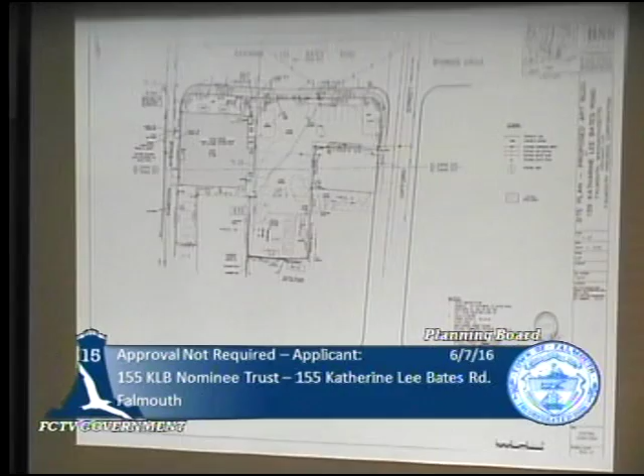The overall lot coverage by both buildings, paving, and parking is 70.57%, which is 5% over what's allowed in the B3. Actually, it's over what's allowed in the B2 also, I believe.

We saw that this building is non-conforming to the setbacks from both Haddon Avenue and Katharine Lee Bates, so we went to Eladio Gore and got a front yard designation letter, which makes Gifford Street the only street where the buildings are at least 25 feet back. So Gifford Street is the primary front yard, with a primary front yard setback of 25 feet. Katharine Lee Bates is required to have no more than a 10-foot setback from the street line for structures.

All the underground utilities are in Gifford Street and Haddon Avenue, partly because of the history of how Katharine Lee Bates was put in. These were two through streets, and water, gas, electric, and everything is down here, and the same here. There's actually a short sewer stub in here, which I can get to later. But there are no utilities in here, and there was a comment from the engineering department about not cutting Katharine Lee Bates — there's a moratorium on it. As it worked out, the moratorium on cutting Gifford Street has lapsed, so we're coming in with utilities from Gifford Street. No need to cut Katharine Lee Bates.

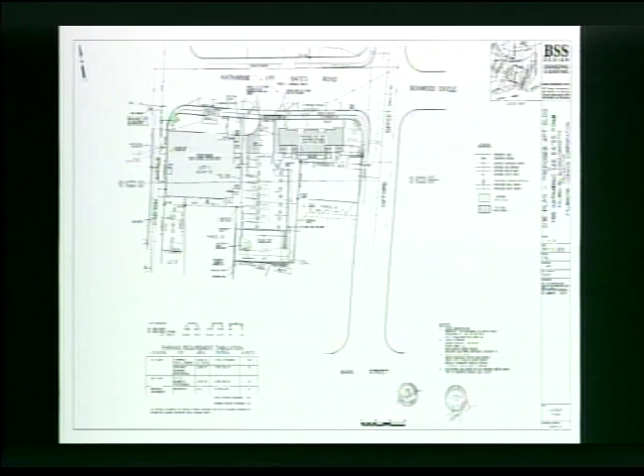The curb cut is basically the same, though we had to move it to the west about 6 or 7 feet because of the size of the building. You can see it's moved over and redefined a little bit. It's a little undefined right now, so we put in some more curbing. It's 20 feet wide at the throat, and widens out.

Since many, or all, of the Fairwinds Clubhouse members are dropped off by car, or use the couple of large vans Fairwinds has, we have a large area here for drop-off and pick-up. There's a crosswalk running from the apartment building to the front door of Fairwinds, and also a handicap spot. Together that makes 29 feet here, including the crosswalk, and another 8 feet with one handicap spot, which will generally be open — basically open for emergency vehicles too, since they do occasionally get an ambulance call here.

My office happens to be right over here, so we get to see some of the excitement that goes on once in a while.

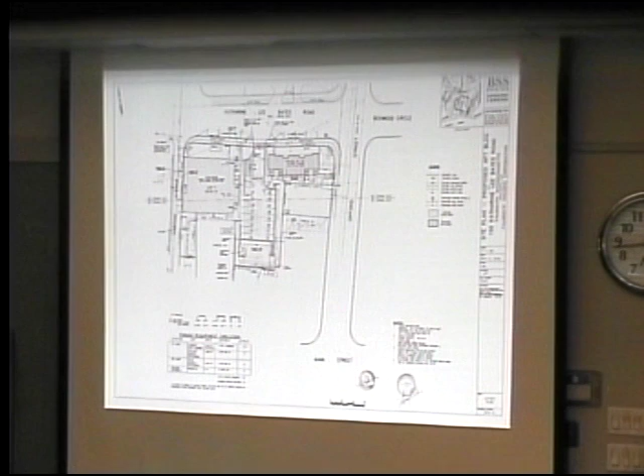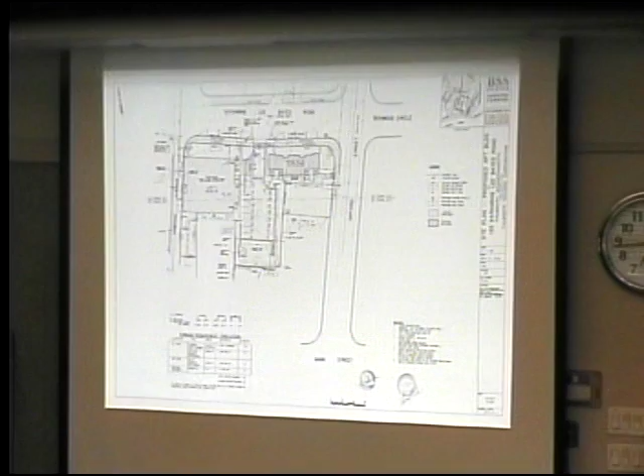So we have the vans dropping off, coming in here. There's a large gravel area where they can drive in, turn around, or pull into one of these spots. There's also the dumpster back here — right now it's a little further up, where the existing pavement ends, up the hill. This building takes up about 7 parking spaces, but we've added 4 parking spaces down here. From what we've seen from our window, the parking need hardly ever fills this up.

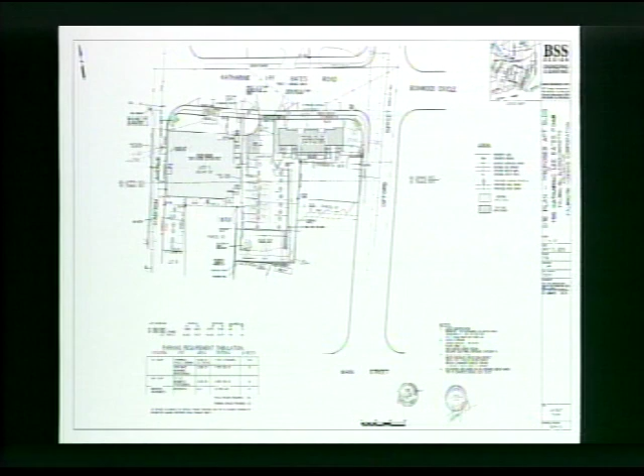As you can see, it's just a simple paved driveway, straight in here. The grading runs from Katharine Lee Bates down, and this is the low spot on the property, so runoff will flow into a catch basin down here, and we do have 2 leaching pits in this location.

So we have the 2 leaching pits here, that's for the parking and stormwater runoff. The apartment building will have downspouts and pipes running to a leaching pit in this location for this building.

There was a comment in the engineering review about this being undersized. In my response I noted it wasn't clear, but we're improving the stormwater runoff situation by adding this drainage, though it's only enough for the north half of the building flowing into this location.

We have requested a reduction in the parking requirement by special permit, from I believe 32 spaces to 23 spaces. This is based on several factors: the different peak hours of use, and the different businesses here like the printing shop, where people come in and pick up, and some offices with different hours.

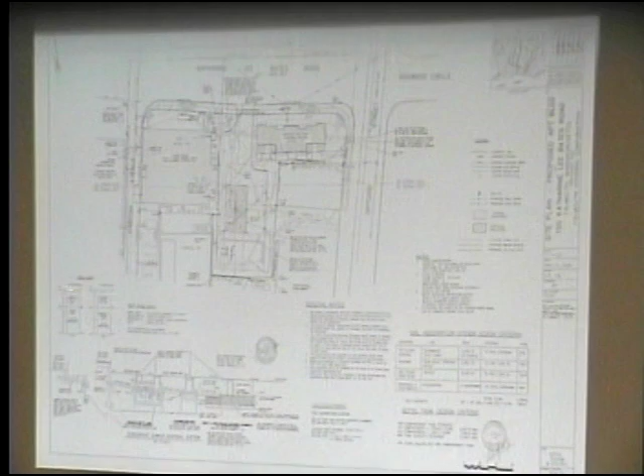So we have them shown here now. We did not do a test pit in this location or this one, but we know from here that once you get through the fill... this used to be a car repair or car sales shop, so it's sort of reclaimed land with fill there. This location was historically a house site, taken over by Katharine Lee Bates. We don't expect fill in this location.

I know from other excavations nearby that down 4 or 5 feet it's sand and gravel. I added the note Scott requested, that any strip out, similar to a septic system strip out, will remove unsuitable material from around the drainage pits, both here and if any is encountered in the other locations.

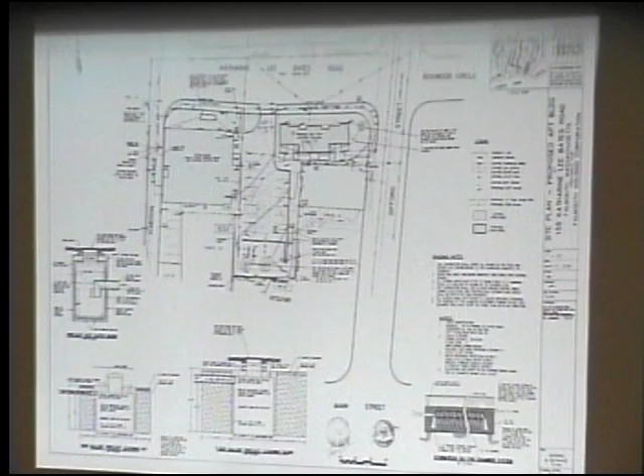Tom Lee's office did the landscape plan. So briefly, some of these are existing trees. There are 2 trees here, Norway, I believe sycamore maples, in this location that are in not good health. They are on, I have to check, which property they're on. I know one of them is on our property.

Do you recall, Tom, both of them? The lower one is on our property. This one, the larger one, is also on our property. This one is in poor health and causes somewhat of a blind spot coming out. But anyway, these two, because of their health condition, are proposed to be removed.

Another street tree added here, and then within the parking areas, some other trees added. Also some screening trees or shrubs along here and along here.

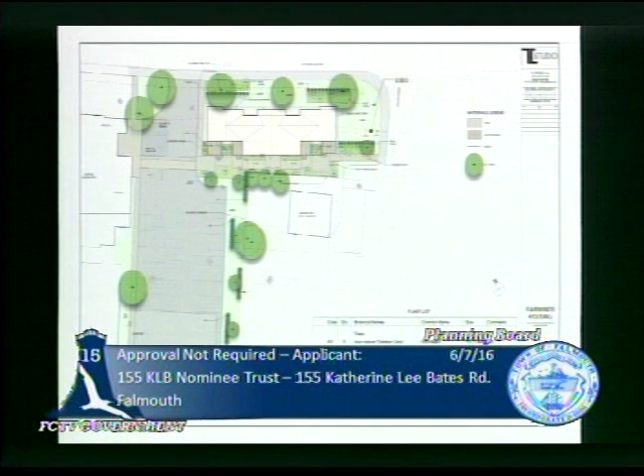This is a series - there's 4 decks, 1 per unit here, and a series of concrete patio walkway areas through here. So there are interior walkways.

One purpose is to get the occupants over to the building, to the clubhouse, but it also opens up and connects with the existing sidewalk on Gifford Street here, and there's a sidewalk up along here to get to Katharine Lee Bates, and on this side of the driveway to get up to Katharine Lee Bates.

So there's good pedestrian circulation in here, and I think good screening between the existing trees that we have here and around, and the proposed trees and shrubs - a good landscape design going there.

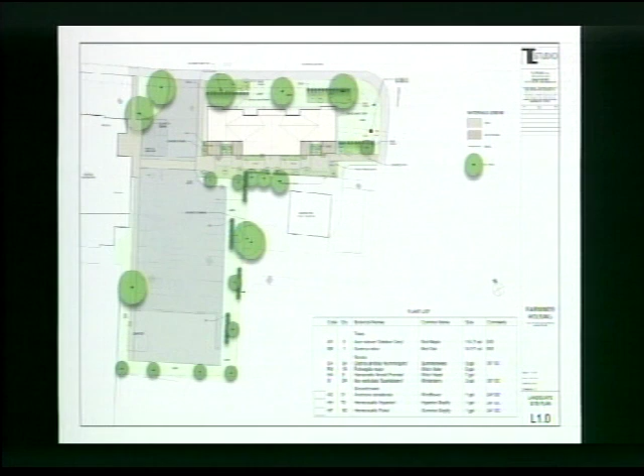Their activities will be focused back here and over to the clubhouse, and not going directly out to the sidewalk on Katharine Lee Bates. So there are no doorways along this side of the building.

So this is the south elevation facing onto the site. We have the doors here - there's a door, sort of a side opening door there and a side opening door there. This, I think, is the door that just goes down into the basement.

And then the west elevation, this will be visible from the Fairwinds Clubhouse, and this is the elevation that will be visible from Gifford Street.

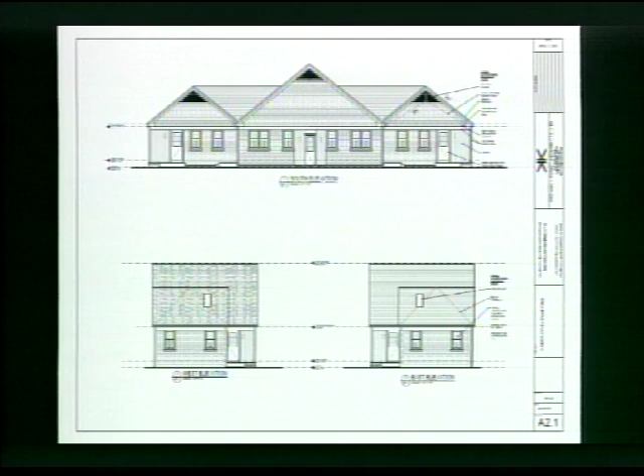Well, there are the floor plans, we can go through that quickly. I don't know if you want to talk about this, John, or I can just go through it quickly. Let's go quickly - yeah, it's basically just 4 units. There's a bathroom, kitchen, bedroom area in each unit. 4 units, 1, 2, 3, 4 units.

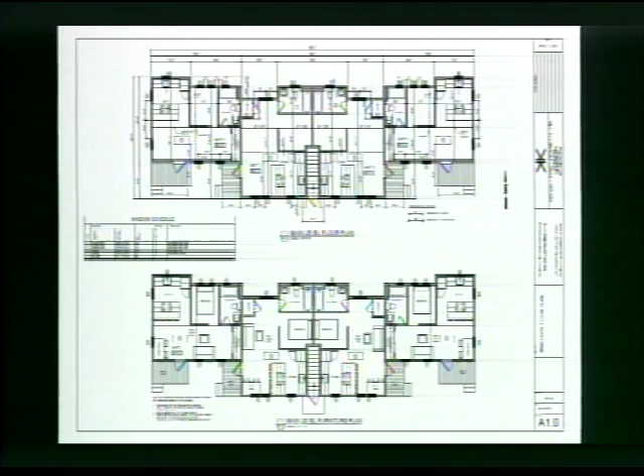That's it? Yeah. Thanks, Tom.

I just wanted to add on the shared parking. One of the factors in the grant of the special permit for reduced parking by the Board of Appeals is downtown location or proximity of the site. So one of the arguments we'll put forward to the zoning board is that the location is downtown. It fosters pedestrian travel and less need for vehicles. You saw the public parking spaces directly adjacent to this property.

If you continue traveling west towards the Mullen Hall School, there are an additional 6 spaces - 3 on Katharine Lee Bates, on the same side of the street as the school, and another 3 on the opposite side where the snow building is. So there's that public parking available, and if you want to go a little further, you have Library Square. That's another factor I wanted to mention - I think the availability of public parking is one of the key elements in the reduced parking for this location. So with that, we'd be happy to take questions.

Doug: I have a question about the drainage on the roof, the roof runoff. Why is it not possible to catch the south side of the main building? It could be possible, it was just a little more difficult. We didn't want to get into having to...

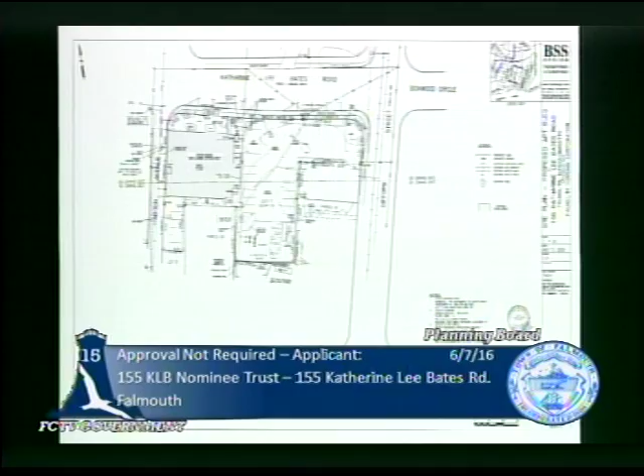They won't be able to do that in the future if this building gets put there. So they're going to go down to the end and turn around - there's some gravel uses here, a gazebo and some gardens that will have to be removed to enable the turning down here rather than turning up top.

Okay. And also, you mentioned in your letter that the curb cut's going to be approximately 8 inches more, but you're going to move it? I think in the letter that was in my response, it's saying the cut in the pavement would be about 8 inches wide to remove some. The curb cut is moving

west about 7 feet. They're not going to require a permit for that, or? Yeah, we have to file a street opening permit, a curb cut permit to do that. And that was one of Scott's comments, that we would have to file that permit application.

And what about the 8 inches? I said they typically make a saw cut about 8 inches away to excavate and remove the curb. And who will grant that relief, what board? Well, the permit, the curb cut permit, comes from the engineering department. Correct, and that's where Scott said for that narrow amount of cutting, Pete McConaty said that would be acceptable. Okay, thank you.

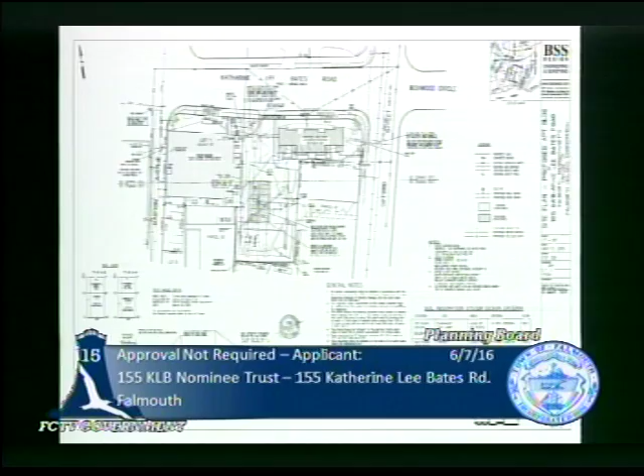But you do have a stub there. I don't think it would really technically be an extension. You'd have to do the work privately. Can you show where the stub is? Here's the stub, and where's the edge of the property? Property is here. Okay, so the stub is beyond the property line. That's clear enough, thank you.

Another question - is there a referral from the fire department about access? Haven't got that. Let's see if one was sent. I didn't get over to talk to Mel. I don't see it, but I will check in with the fire prevention officer. This is basically the same layout, the same amount of area up here as what they have now.

I believe they did issue one, if you can give me a minute. But it may have been filed with the zoning board. Let's see, files sent. We usually get a letter.

I do have a referral back from Mel Trout, and they sign off with no comment.

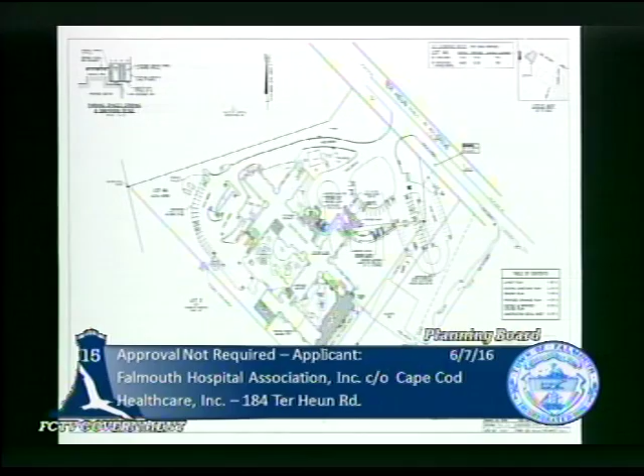It's located on 6.27 acres at 184 Ter Heun Road, to the northwest of Falmouth Hospital itself. It's abutted by other property of the hospital or affiliates. This is the Heritage Assisted Living Center over here. To the northwest is the Gosnold Treatment Facility. The hospital is over in this area. BB Woods is over here.

JML has 132 beds. The facility is almost 27 years old. It was first permitted in 1989, and 12 beds were added in 1992. So it's time for some upgrading, and upgrades are proposed, including construction or reconfiguration of new private rooms. There's no increase in the number of beds, just a change of a significant number of rooms from semi-private to private. So some rooms will be new, and some existing space will be reconfigured from semi-private to private.

The new rooms are in this area, a little over 6,000 square feet of addition on the first floor, about half of the proposed additions. Over here there will be some new physical therapy rehab space, and a few other additions. There's a new stairwell in this area. At the front entrance there'll be a new entrance, and outside the access will be improved with better ramps. Next to that area there'll be some administrative space, and a new employee dining area in this area.

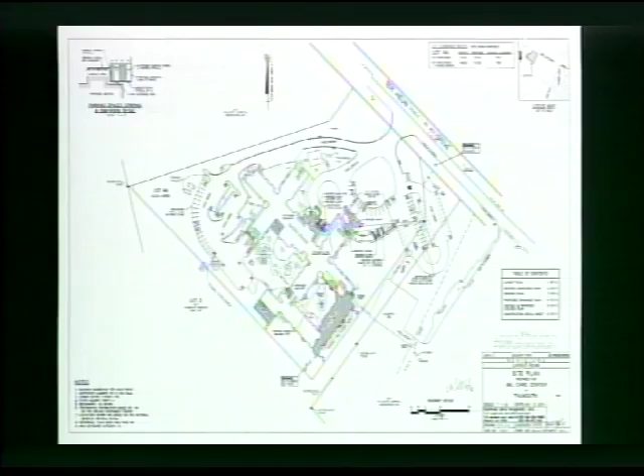So altogether there are 6 different additions, which total about 12,325 square feet. All of that is on the first floor, and this shows a bit of the first floor plan, but there is some second floor space, which is more activity space for the nursing home residents. The existing building has 72,000 square feet, so this is an addition of about 15%.

I'd like to emphasize that there are no zoning nonconformities with the property. The use is a by-right allowed use, a nonprofit facility like this in the public use district. There'd be no increase in the number of beds, no changes in the adult daycare program involved in this application, so no programmatic changes really, and no increase in parking requirements or traffic trip generation. I submitted to the board yesterday a parking analysis. Our zoning bylaw actually provides that only 1 parking space is required for every 3 beds, which would only be 44 spaces, but there are 132 spaces shown on the plan, and there's actually opportunity for a lot more parking without interfering with driveways or fire lanes. There has never been a parking problem at JML.

With me tonight is Colleen Pino, Executive Director of JML Care Center, Jeffrey Dykins, Chief Operating Officer of Falmouth Hospital, and Michael Bachstein, Director of Facilities for Cape Cod Healthcare. Also Greg Sarunian, the architect on this project and others for Cape Cod Healthcare, and Raul Lizardi Rivera, a professional engineer with Holmes & McGrath, the firm that did these plans.

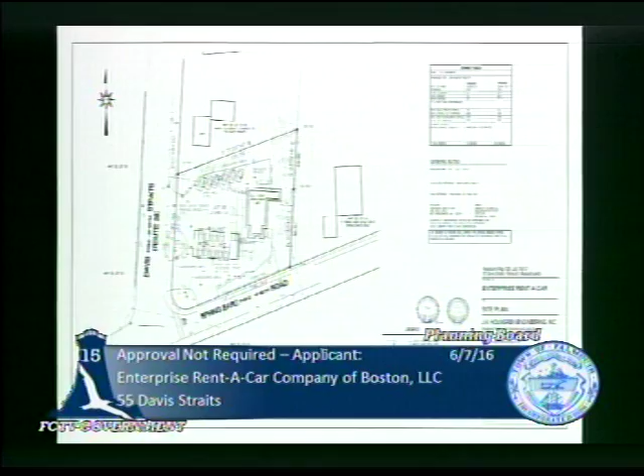John, you got any questions? I do not. Doug? Well, the other thing that brings you here is not just the spaces, but it's a change of use. Yes, I have applied for a special permit, and I am on the next zoning board meeting. Right. And usually when we have a change of use in the site plan review, we try to encourage some improvement if it can be considered.

Maybe there would be some landscaping improvements that could be improved. I don't know what you have in mind, but we are keeping the existing landscaping because everything's in good condition. We'll obviously make it look a little bit better with new mulch, etc. But as far as the landscaping itself, the islands and so forth, we are keeping. I can show you what our plan for the exterior of the building is going to look like. It's going to look better than what it is right now.

And that is, we are going to be painting the building. We're going to be doing some stone on the bottom of the building, and obviously putting our signage up. So there's kind of a couple different sheets, but it will make it look a little bit better than it currently does. The building is a little bit run down, so as part of our renovating the building, we are going to be putting on a new roof and painting the building, and then just renovation on the interior for our use.